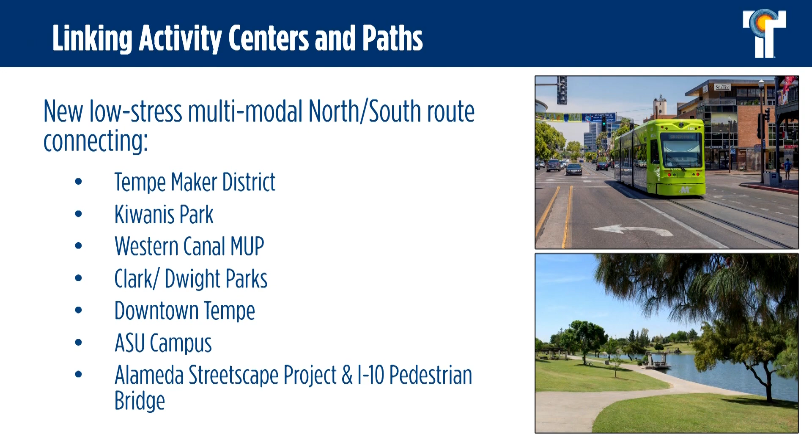This project will also connect to neighborhood parks such as Dwight Park and the soon-to-be-completed Clark Park. The project's northern terminus will connect to downtown Tempe, the downtown Tempe core, as well as in close proximity to ASU's campus. Intersecting this project is another bike boulevard, the Alameda Streetscape Project, which runs along Alameda Drive from 48th Street to Rural Road. With the I-10 Broadway Curve project, that will also connect to a future pedestrian bridge, giving a direct connection to this Alameda Streetscape project, which also travels from 48th Street to Rural.

You may have previously heard of this project as the North-South Rail Spur Multi-Use Path Project. This was originally identified in Tempe's Transportation Master Plan. I have an image here on the right showing that original alignment, the red dotted line. That project was originally intended to be adjacent to the Union Pacific Railroad as an off-street multi-use path with lighting and landscaping. City staff pursued and were subsequently awarded a construction grant to pursue that project in 2016.

With that, we began the final design portion of the project in 2018. This included robust public and stakeholder outreach, as well as our concurrent efforts to negotiate with Union Pacific Railroad to have this off-street multi-use path adjacent to the railroad.

We got as far as the 30% design, and that's when it became apparent that the original alignment would no longer be feasible. This was primarily due to two reasons associated with Union Pacific Railroad. First, we exhausted our negotiations to get the required easements for the project. And then most importantly, there was an escalation in costs that were not originally identified within the preliminary study.

So there were two main costs. There was the upfront capital cost, which exceeded the entire project's budget just with associated capital costs for Union Pacific Railroad. Additionally, they would impose an annual fee. So both of these costs would far surpass this project's available budget and the transportation program going forward.

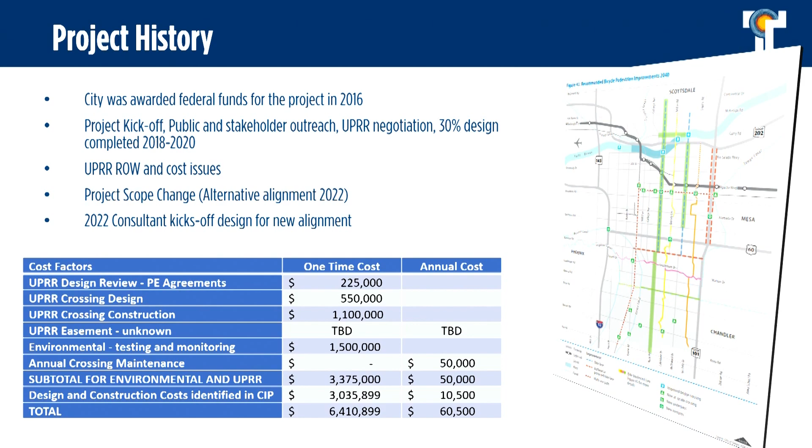So with that, we sought feedback from council in 2019 on an alternative alignment, which would allow for this north-south active transportation corridor, but would move the project away from Union Pacific Railroad. Following that meeting in 2019, council recommended moving the project a quarter mile west to Roosevelt Street, which is this project I'm presenting on today, the Kyrene Roosevelt Farmer Bike Ped project.

With that, we had to do numerous steps to change the scope of the project with Maricopa Association of Governments and to retain our federal funding. That process took about 2 years, but we received approval for the new alignment along Roosevelt. So with that, we kicked off this new project in 2022.

So when I talk about making this corridor more accessible and comfortable, some proposed improvements include protected and buffered bike lanes where possible, a two-way cycle track along Kyrene Road, an off-street multi-use path with lighting and landscaping, and ADA directional ramps along the entire corridor to improve pedestrian accessibility.

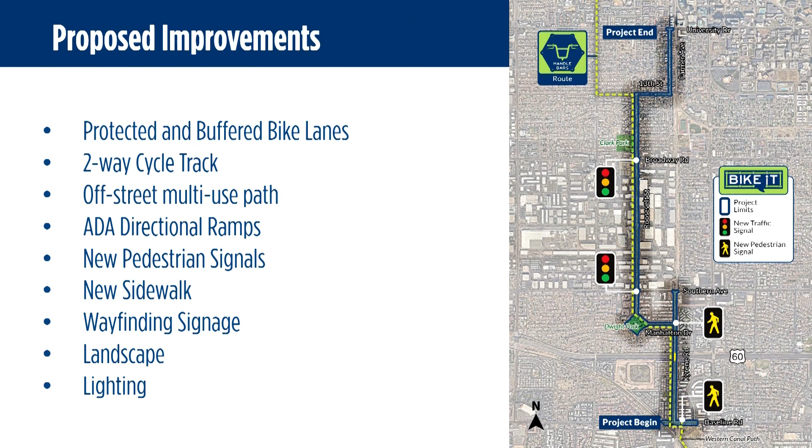Since our new project kicked off in 2022, we developed our 30% design plans and held public outreach in April of 2023. We also sought feedback from Tempe's Transportation Commission, and from that feedback from the first round of public meetings as well as the Transportation Commission, we revised the designs and developed our draft 60% design plans.

We then in September sought feedback for those revised 60% design plans, and again we got feedback from Tempe's Transportation Commission. We also held additional outreach with residents within the Dwight Park neighborhood to seek their feedback, along with the broader public outreach we held for the public as well. That brings us to December of 2023.

We revised the design based on that feedback and developed our final 60% plans. We again went to the Transportation Commission, and we also went to the Parks, Recreation, Golf, and Double Butte Cemetery Advisory Board to seek their feedback since it directly connected to those two parks as well.

So now I'm going to go through the corridor. We're going to start on the northern end of the project at University Drive along Farmer and 13th Street. From Farmer, from University to 13th Street, this corridor is much more narrow, so it was not wide enough to provide for on-street or dedicated bike lanes.

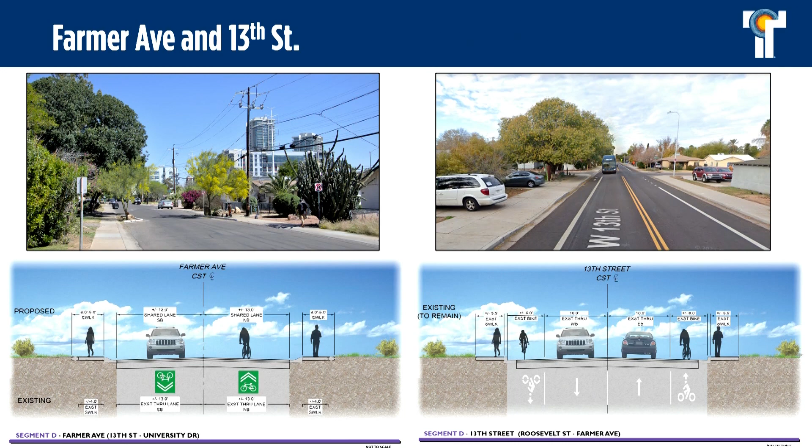Now we're getting to the portion as we turn south at 13th Street to go along Roosevelt Street. Currently as it exists today, we have a smaller bike lane, 2 travel lanes, and a center turn lane along this corridor from Broadway to 13th Street.

What we'll be proposing here is to remove the 2-way left turn lane. This will enable a buffer space between the bike lane and the travel lanes, as well as new sidewalks. This is the section which is missing a lot of sidewalk along the corridor. Through these improvements, the narrowing of the travel lanes and the removal of the 2-way left turn lane, we did a data collection just to make sure that center turn lane wasn't necessary for the project and would still accommodate the turning vehicles along the corridor. So that's why we're proposing to remove that.

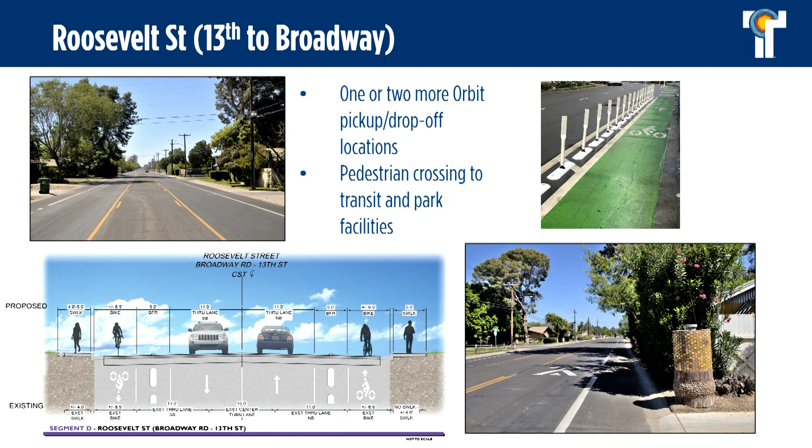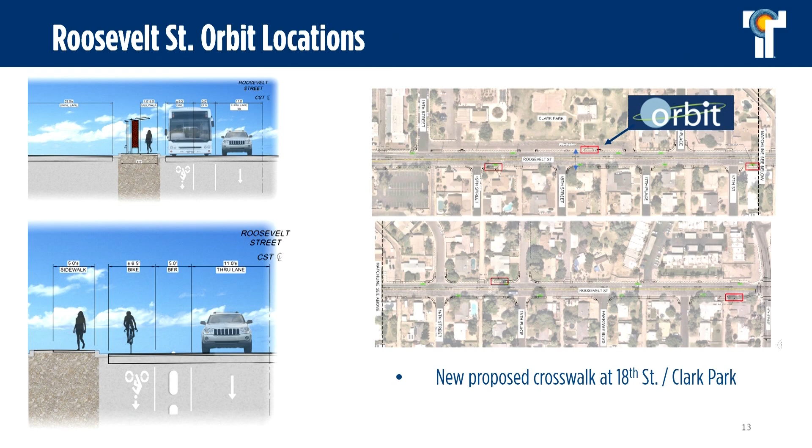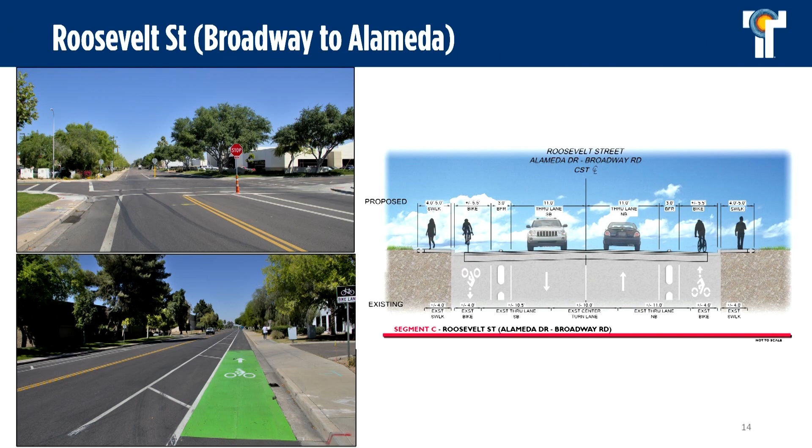This image on the bottom left is actually showing the intersection of Alameda Drive streetscape. That gives you a sense of the connection point to our other east-west running bike boulevard, and will be representative of what our improvements will be on Roosevelt Street. Just this Alameda streetscape does not include the physical buffers that we'll be including.

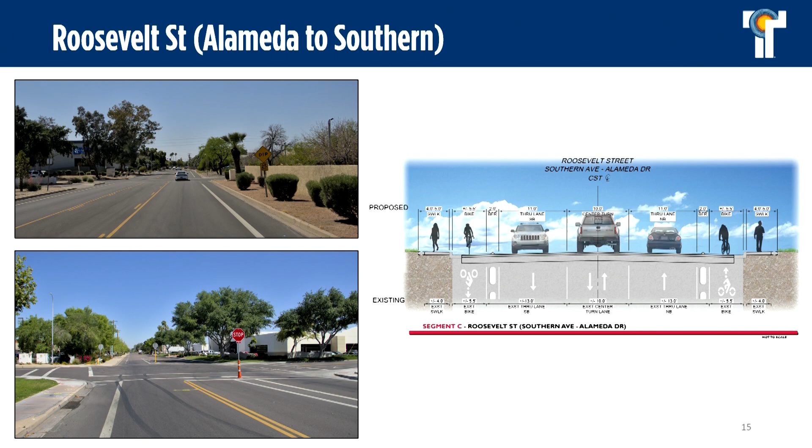As we continue south from Alameda to Southern, there's enough space available here that we will be retaining the 2-way left turn lane. This will accommodate some of the industrial uses here. We're within that maker district, so there's predominantly light industrial and some other commercial uses. So we will be retaining the two-way left turn lane, the travel lanes, and again incorporating a buffered and protected bike lane.

As we continue south along Southern, this is where we get into the Dwight Park neighborhood. Prior to our second round of public meetings, we had 3 different households reach out to us within the Dwight Park neighborhood, which requested an on-site meeting with staff to relay their concerns with the proposal to have a multi-use path going through Dwight Park. Staff from engineering and transportation as well as community services met on site with those residents to better understand the concerns associated with the previously proposed alternative, alternative 1, going through Dwight Park.

Through that meeting, the concerns that were raised included protection of the mature trees within the park. It also had a consideration to not reduce the available turf or grass area within the park, as well as a general concern about construction impacts and the sharing of the path between bicyclists and pedestrians along the route.

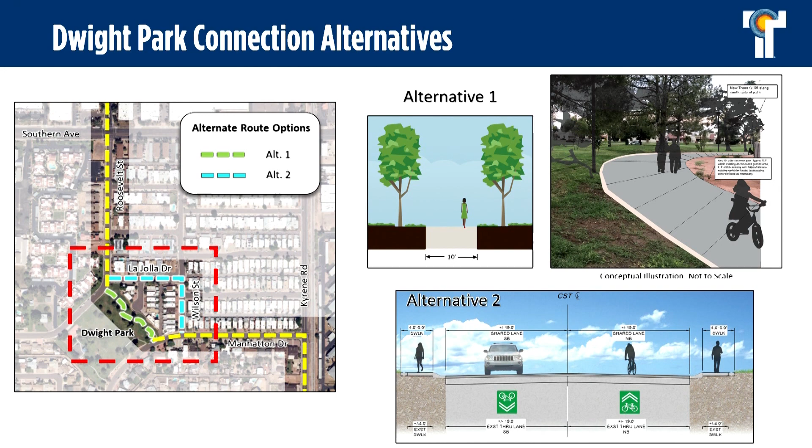With alternative 2, this would be a similar improvement to what was shown on Farmer Avenue. It would be an on-street improvement. The width is not enough to provide for a dedicated bike lane, so this would be a shared lane marking improvement, where bicyclists would share the road with vehicles, and then we would make the necessary improvements to the sidewalks as well. So we committed to revising the design of alternative 1 and introducing this new alternative so that we could get broader feedback during our public meetings, which would be held two weeks later.

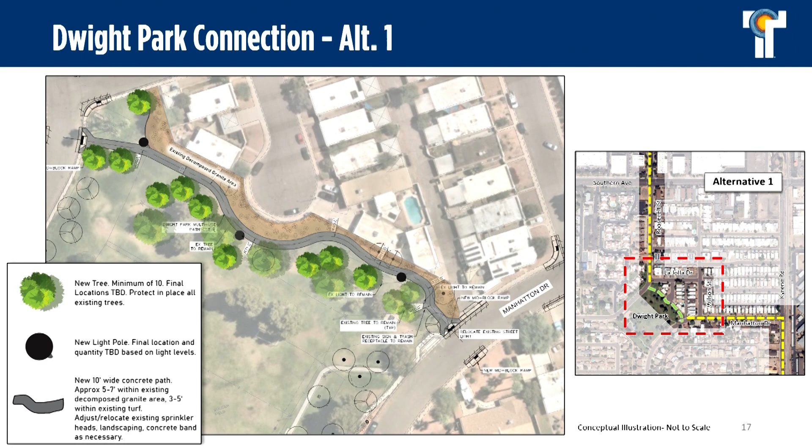So we would propose to connect Manhattan Drive to Roosevelt Street with this, again primarily placing the path within the decomposed granite area, and making the ramp improvements and including supplemental pedestrian lighting as well. This lighting would match the existing park's lighting, so this would not be a new standard. Then with alternative 2, that shared lane marking would, instead of going through Dwight Park, deviate and not connect to Dwight Park, going along La Jolla and Wilson Street.

Additionally, some of the other themes were to include additional Orbit stops, so we'll be working with our transit team to identify additional stops along that corridor, and to provide for more physical barriers and addition of vertical delineators. So we're going to work with our traffic engineering team on what the appropriate spacing would be for that to include better visibility. Finally, we were asked to extend the project further to the Western Canal entrance on the south side of Baseline Road, not just stop at Kyrene Road, to facilitate a better connection between those two path connections.

So after reviewing the feedback, we are pursuing alternative 1, which is the Dwight Park path alternative.

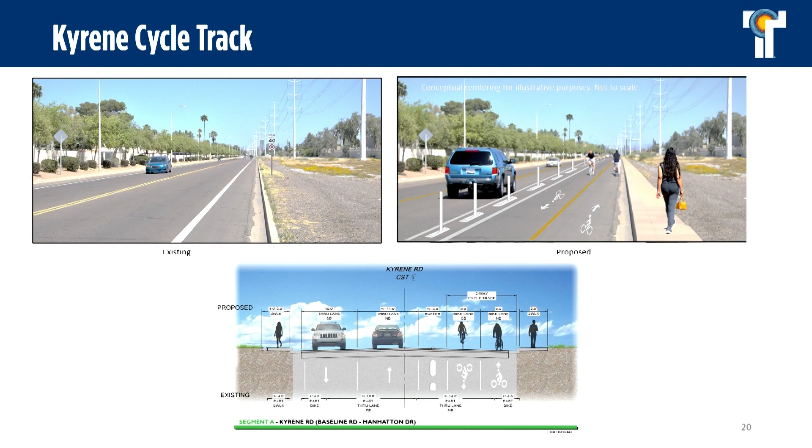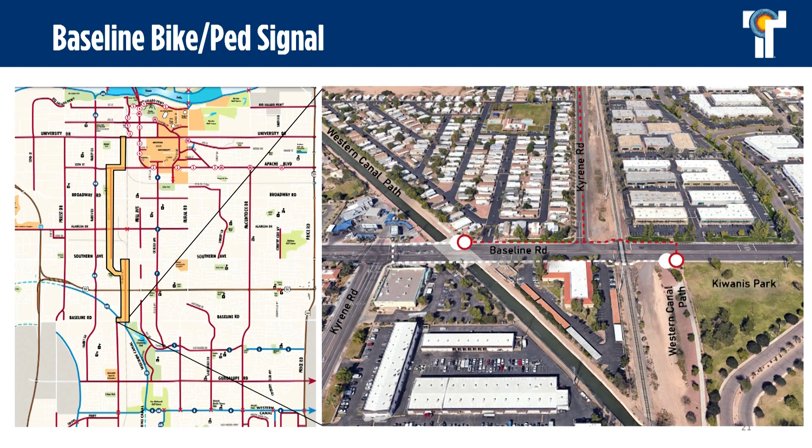Can I ask a quick question? Are there going to be lights at both Baseline on the left side and where the circles are, and at the Western Canal Path?

Thank you, Vice Mayor Adams. Let me move on to this slide, which should show that. We'll be proposing just one dedicated signal here, on the east side, east of the railroad tracks at the entrance of the Western Canal on the south side of Baseline Road. This connection would be made along the south side with a new pedestrian signal.

This signal is similar to the ones at Grove Parkway, the Highline Canal, or on Elliott and the Kyrene Canal. It's not the flashing red you see on Western Canal, like on Rural or McClintock. This will be a solid red phase, looking like our other signals, solid for the pedestrian crossing. It's only activated when the pedestrian pushes the button, otherwise it won't be activated.

We're proposing that just east of the railroad tracks, and to facilitate a connection over to the other side of Western Canal, we'll provide a 10-foot wide pathway, which will include supplementary lighting, as well as additional signage for the one driveway it crosses, to alert drivers that there might be increased pedestrian or bicycle traffic along the corridor.

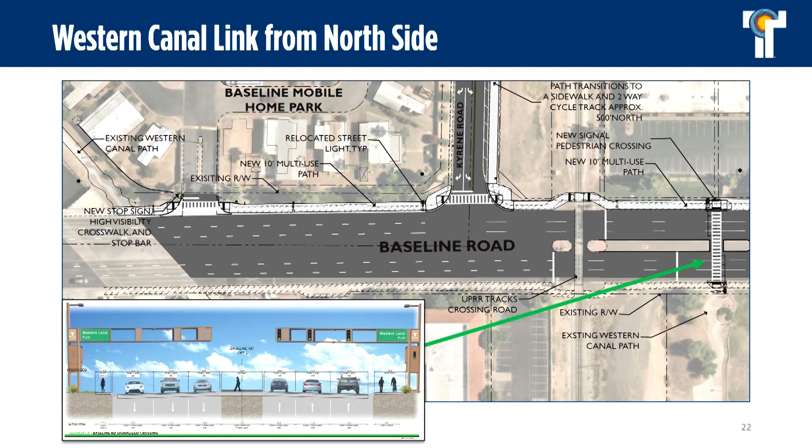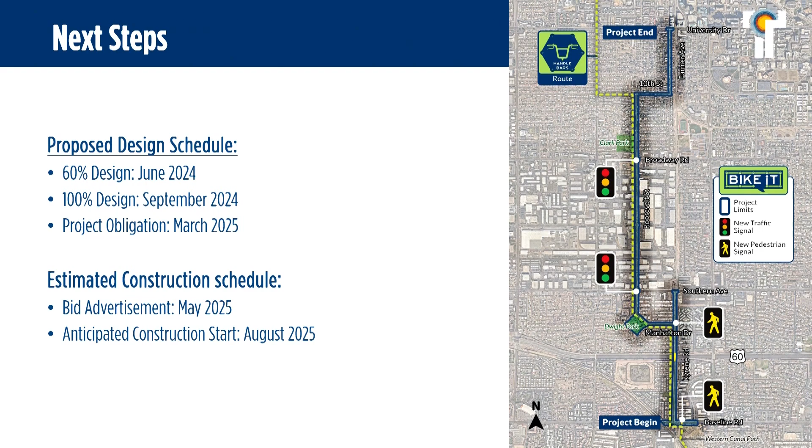I'm happy to answer any questions you may have. Thank you so much for the informative presentation. Councilmember Chin, do you have any questions or comments for Chase? I do, thanks.

One thing I want to emphasize for everyone watching is that these safety measures aren't simply bicycle-centric. I think it helps everyone, including those of us driving in our cars. What was obvious to me was the addition of sidewalks for pedestrians, making it safer for everyone. We have overall goals in the city for safety with Vision Zero, and this simply supports those initiatives. I'm really happy to see that.

A couple of questions for my education. The color of the sharrows are always green, but the regular bike lanes, as they appeared in your illustrations, were white. What's the standard industry convention for the color scheme?

What we'll be proposing with this project—this was just a typical cross-section, so it doesn't do a good job illustrating where that green symbol is located. We'll be proposing to put those at all the intersections, where you might have a vehicle turning off an adjacent street, which increases visibility of that bike lane. So we propose having those green bike lane symbols after each intersection. For the sharrows, we're still reviewing that with our traffic engineering team.